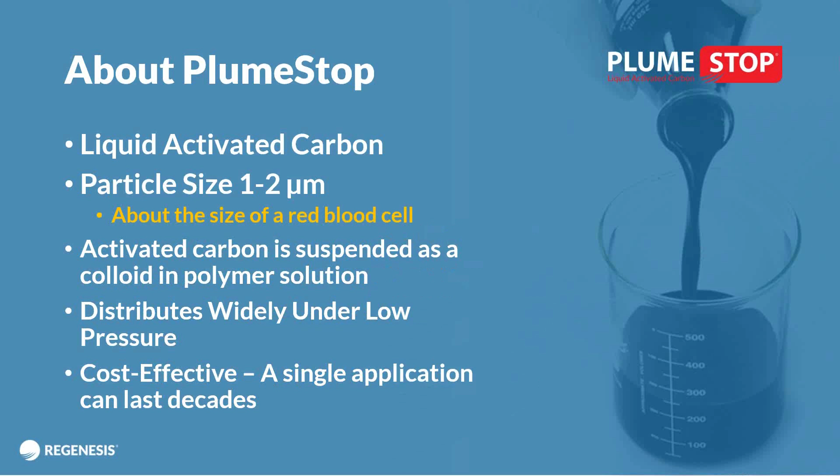So it looks like black ink. You put it in the subsurface and it'll distribute widely under low pressure, and a single application is cost effective, and as we'll talk about later, it can last for decades.

So how does it work? Again, the activated carbon coats the aquifer matrix, and it provides extremely fast access to sorption sites because it's only 2 microns in size as opposed to granular activated carbon. And if you're interested in the actual kinetics of it, we'd be glad to get you some information on that by third parties, where it shows that the smaller particles offer much faster reaction and sorption than larger particles such as granular activated carbon or powdered activated carbon.

And once you flow this into the subsurface, it converts that underlying geology into a purifying filter. So as the plume migrates, contaminants are sorbed as the groundwater passes through that zone.

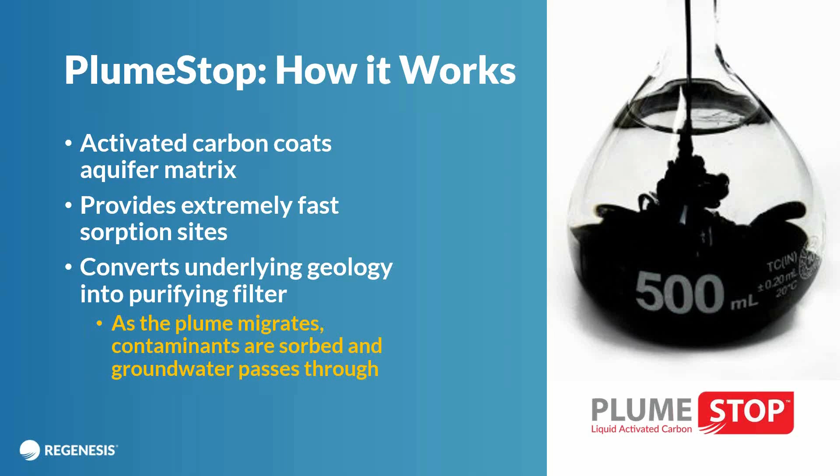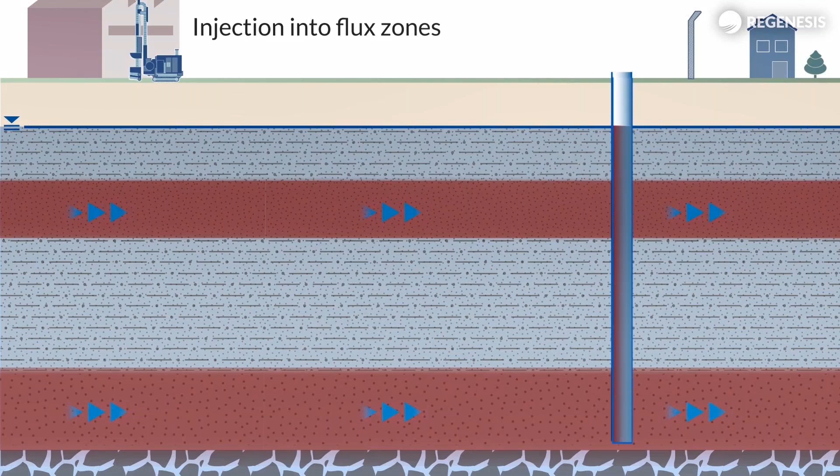And in this case, you get a driving force taking contamination from the flux zone where there's high concentrations to the lower concentrations in the immobile porosity. So let's take a look and see what happens over time here as this moves forward. So here you have the contamination moving through the flux zone from the left to the right, and you see contamination migrating out into the immobile porosity.

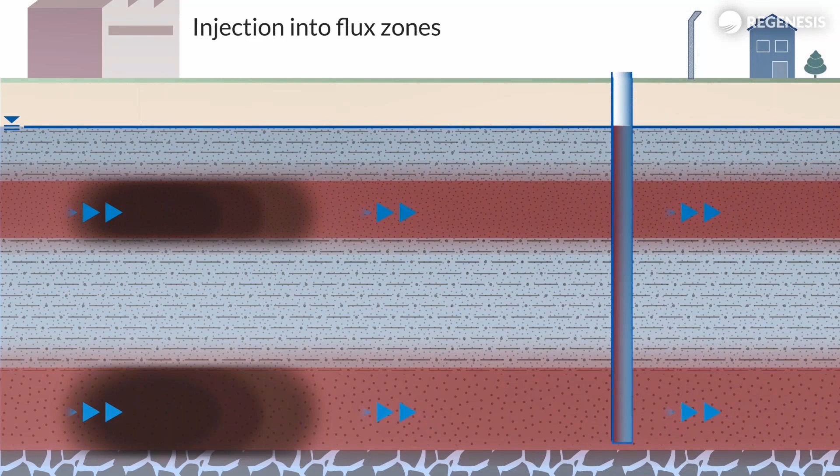That's forward diffusion. What we do is we come in, and if you install Plumestop, the Plumestop will migrate out into the flux zone and settle in, permanently converting the subsurface into a sorptive filter with a 1 to 2 micron layer of carbon. And it does not stop flow or block permeability. We call this the Plumestop treatment zone. And you'll note on the up gradient side of the flux zone, there you still have contamination migrating into the Plumestop.

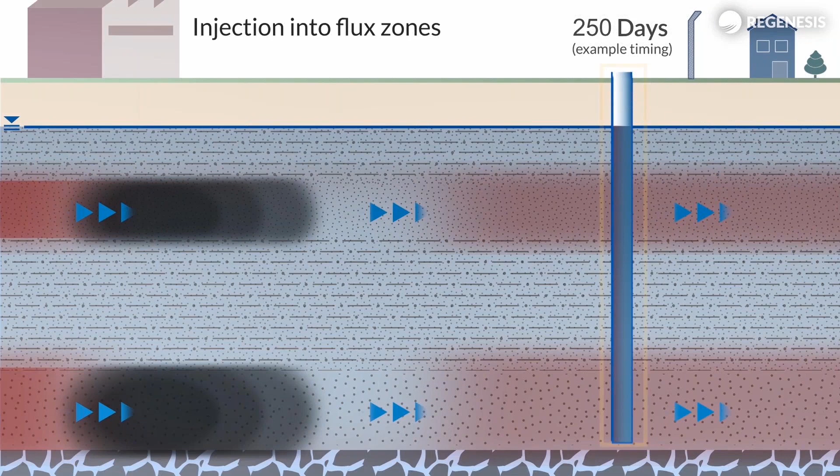And down gradient of the Plumestop, all of the contamination has been taken out of the groundwater, and you have clean water exiting. Now, once you have clean water being generated by the sorption of the Plumestop, you'll start to see back diffusion. That is the contamination moving back out of the immobile porosity and into the flux zone. Well, within the Plumestop area, all of that back diffusion is captured, and you see nothing moving out. There is some back diffusion still occurring outside of the Plumestop zone, and you will pick up a small amount there. But where the Plumestop exists, you have all of the back diffusion captured and clean water exiting the Plumestop zone.

So now you've seen how Plumestop can actually stop contamination from migrating. You see PFAS material is now locked up onto the Plumestop area, and if it's at the toe of the plume, there's no back diffusion at all. If there is back diffusion, it's caught by the Plumestop. And you see nothing coming out at the back in your monitoring well. So let's focus now on the impact of that. What's happening here? By locking it up with Plumestop, you've actually eliminated the risk of the PFAS.

Some of you may have heard me tell this story before, but back in the mid-'80s, there was a medical doctor that left his practice in Portland, Maine, by the name of Frank Lawrence. He left his practice to become the first environmental risk assessor, and a risk assessment company, ELD, Envirologic Data, was formed. And he would go around the nation speaking to regulators and PRPs about what environmental risk really is and how to stop it. And he's the one that showed that risk is equal to hazard times exposure.

And I remember vividly sitting in a room full of regulators when Frank said, can you ever imagine having a 3-year-old child stand within 10 feet of a man-eating tiger?

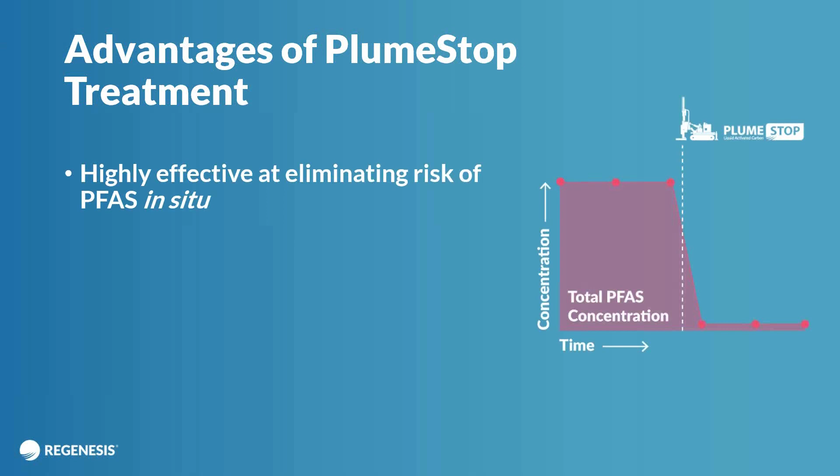So the advantages of Plumestop treatment: highly effective at eliminating the risk of PFAS in situ. Concentrations drop dramatically upon injection, depending on how close your monitoring well is to that zone, as we just discussed. It can be within a month, you'll see it drop to non-detect. If your monitoring well is a distance from the actual application site, you may have to wait for the groundwater travel time and the back diffusion. However, certainly within a matter of months, you'd see down to below regulatory levels.

It's very cost effective. At this specific site that I just mentioned that Rick McGregor injected in the subsurface up in Canada, it was a very small site. The total cost of that was $73,000 for the design and application. If you had done pump and treat on that site, the estimates are about $150,000 worth of design and installation, and then $60,000 a year.

And as I said, it's estimated the Plumestop will last some 50 years at this site, but let's say it only lasted 20 years. To run that pump and treat system for 20 years would cost you $1.3 million versus the $73,000 that the Plumestop costs. So it's a savings of 1.23 million. So that gives you an idea of the scale of savings by keeping the treatment in situ instead of pumping and treating to the surface and having those O&M costs.

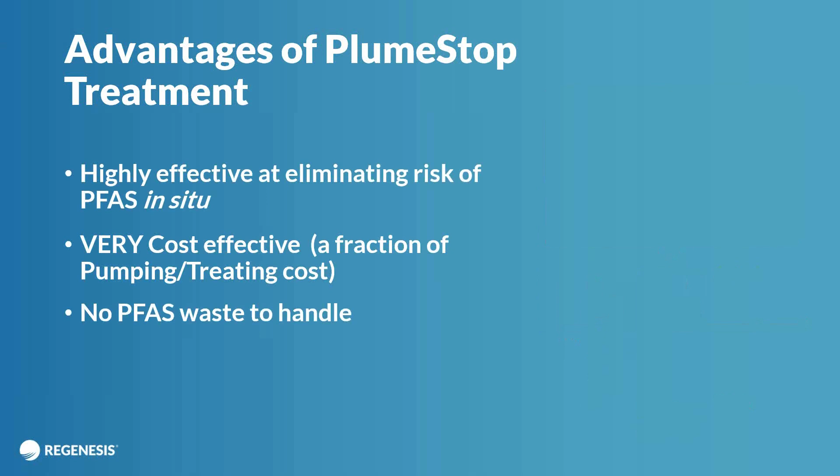The other thing that's really important to understand is that when you pump and treat PFAS, you generate a waste that has to be handled. Whether it's ion exchange resin that has to be regenerated or disposed of, or carbon that has to be regenerated and disposed of, you have PFAS waste to handle. And landfilling is becoming very limited for PFAS waste. And in some countries, it's now banned. So incineration then is the only option.

And I don't know if you're aware of it, but incineration is now in question. There was some research done by Bennington College on a major incinerator in New York, and the professor and his graduate students showed that, in fact, it appears that the incineration of PFAS is incomplete, and that there's incomplete combustion products raining down on the soils around the plant.

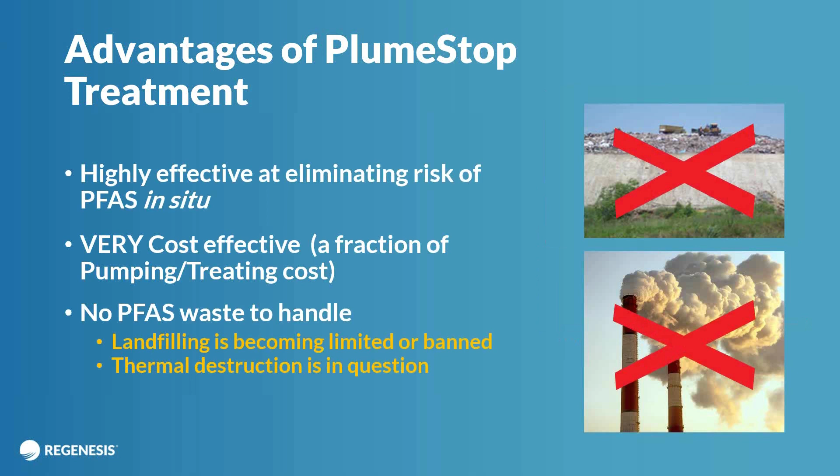And this is not dissimilar to what we saw in the 90s with PCB incineration, where we thought incinerating PCBs was a solution until we found that thermal destruction was incomplete and we generated dioxins. So right now, thermal destruction is in question. So by using Plumestop in situ, you're eliminating the risk of the PFAS and you're generating no waste in the process.

People are becoming aware of the fact that they can treat and eliminate the risk in situ. And so what we're seeing is we have another 94 projects right now in final design or regulatory review around the world. There's a hotbed of this in Europe now, as well as along the eastern US coast. So we're seeing somewhere in the range of about 114 sites that either have installed or are in the process of installing Plumestop to eliminate the risk of PFAS. So as I say, it's growing exponentially.

And the project types range from small manufacturing sites, the smallest ones, all the way up to Department of Defense sites, very large applications, a US EPA Superfund site, and major airports. These have all already been injected. We're already treating PFAS on these sites: EPA Superfund, defense sites, airports, and manufacturing facilities. And I want to mention that on every one of the sites where we've injected Plumestop to treat PFAS, all of the projects are performing as designed, with target PFAS compounds below regulatory levels.

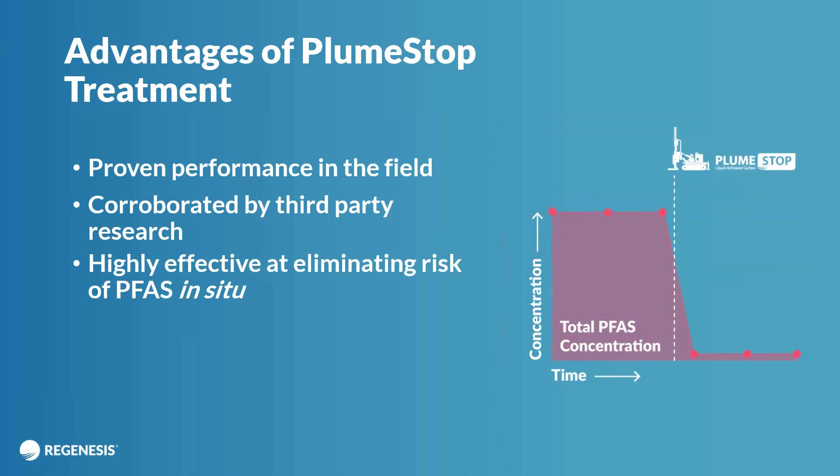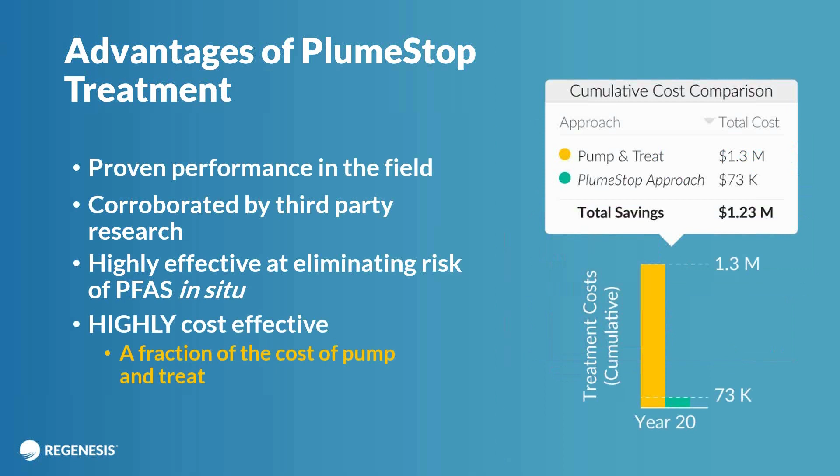And we're now going on 5 years of data at sites, with third-party longevity estimated in terms of decades with a single injection. And by the way, if after that injection you start to get breakthrough in 25 or 30 years, you simply put in another injection and you get another 25 or 30 years of risk eliminated. And it's highly cost effective, as I've shown you. It's a fraction of the cost of pump and treat. Oh, I forgot to mention also that there's no PFAS waste generated by using Plumestop in situ. So that's a look at the technology.

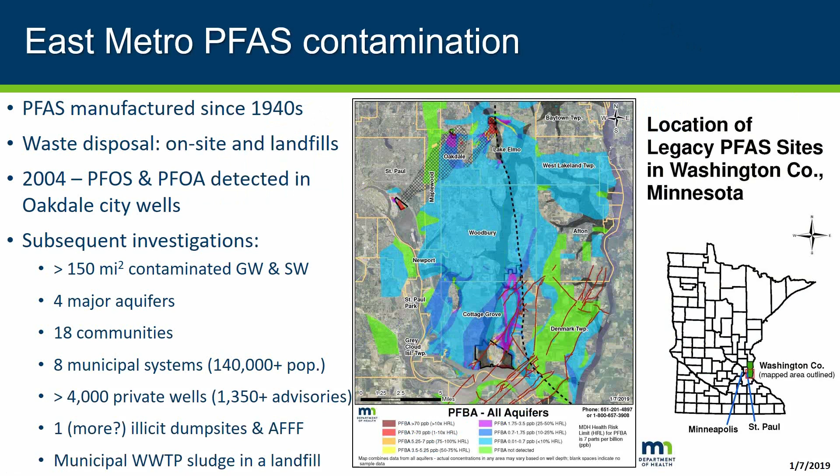We also have a major system of bedrock faults in the southeastern part of the county. This is a horst with fault blocks that have vertical displacement up to 150 feet, and then subparallel joint sets that are also seeming to control the flow directions.

So just a little quick background on where we're at in Minnesota with PFAS in our drinking water. We set very early on some fairly high levels allowed for PFOA and PFOS. As we've learned more about these chemicals along with the rest of the country, you can see our guidance values have dropped dramatically, with some major jumps both in 2007 and then again in 2016, when the EPA issued their lifetime health advisories and the studies related to those numbers.

And our further evaluation of those studies, as well as more recent information, has led us to set even lower allowable levels for the long chain PFAS, such as PFOA, PFOS, and PFHxS. We also evaluate PFAS as a mixture in drinking water through a calculation called a health risk index that allows us to evaluate health risk due to the mixtures that we almost invariably find when we're looking at people's drinking water. And so currently the guidance values are close to some of the low values being set across the country, a little bit higher than some of the East Coast states have set.

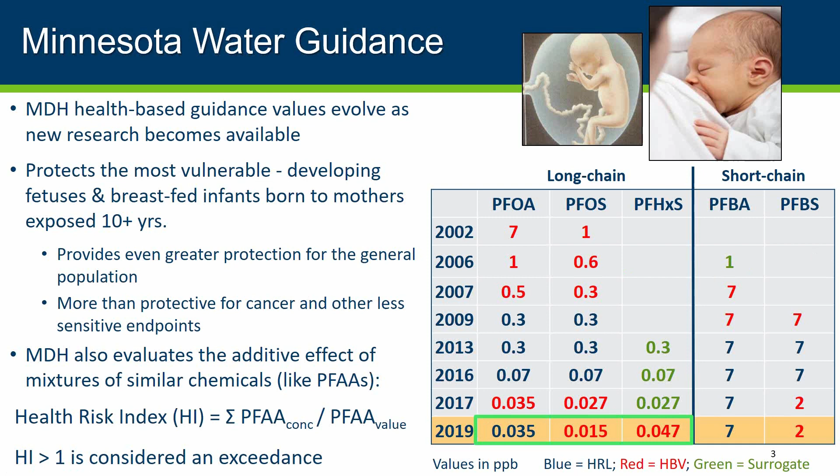So starting in around 2006 through the 2013 period, our work was controlled primarily through a consent order with 3M that held 3M responsible for site investigations and remedial actions at the 3 disposal sites, as well as their own property. It provided partial funding of a state cleanup at a Washington County landfill, and it also provides the funding for our ongoing sampling and treatment of both public and private wells that have been impacted by PFAS, and the treatment needed when those wells exceed our guidance values.

Under that consent order, we provided either carbon filtration or city water connections to about 250 private wells in 2 communities, as well as a treatment system for the wells in Oakdale. It also provided funding for some statewide investigations that I'll talk about in a little while, for things like shallow groundwater, AFFF training sites, fish, wastewater treatment plants, and landfills. Basically, it was funding to allow the state to investigate PFAS at non-3M related sites.

As part of our investigation and cleanup of both the Washington County landfill and the 3M sites, unfortunately, we didn't have Plumestop at the time, or at least it hadn't yet been identified as a possible treatment option. And so it really was back to the future for our work at these sites. And so it was dig and isolate. Some of the dirt was incinerated because of other contaminants that didn't allow for it to be landfilled, but primarily both sediments and soils were excavated, were dredged, and then put into containment cells, triple lined with leachate collection. And groundwater at the sites was basically pump and treat response.

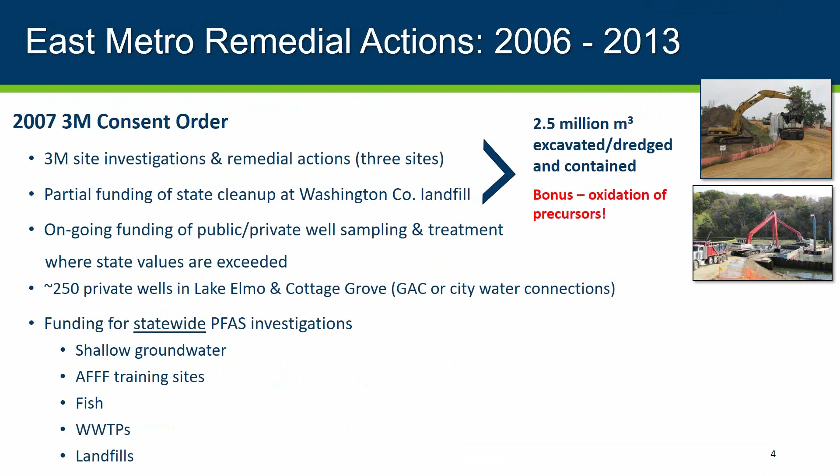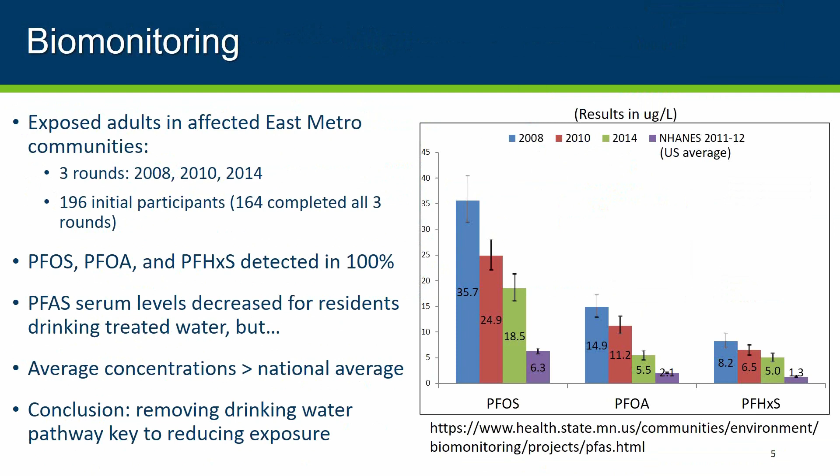People are trending down towards the national average. Of course, across the country, everyone has been exposed to a certain level of PFAS, probably through consumer products if their drinking water is not affected.

In 2016, I mentioned the EPA issued their lifetime health advisories, which led us to lower our drinking water numbers over several years, which expanded our investigation area and the number of wells with drinking water advisories. We've also improved our analytical method to achieve lower detection limits, which also expanded the area that we found to be impacted. And so in 2018, we got another input of funding to help us with this work through the settlement with 3M of a natural resource damages litigation. That primarily is funding clean drinking water for both public and private systems, as well as evaluating a surface water pathway with a secondary goal of doing some natural resource restoration.

So at this point, this is the impacts that we've identified from PFOS and PFOA in the East Metro. You can see PFOS is largely confined to either on-site at the disposal facilities, but also fairly widespread in the northern part of the affected area, and I'll get into that in just a minute. Whereas PFOA is much more widespread, and this is probably due to a change in the chemistry that was being manufactured at the Cottage Grove facility. The earliest disposal site was the one in Oakdale, so it received both sulfonates and carboxylates, whereas the later chemistry and the waste disposal associated with the Washington County landfill and the Woodbury site was focused more on carboxylate chemistries, and so the PFOA and other carboxylates appear to be much more widespread throughout the area.

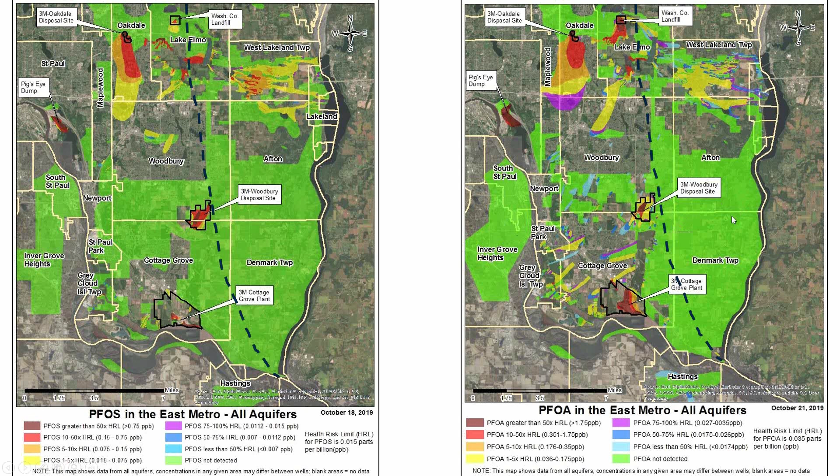The Oakdale disposal site is in a large wetland complex that's drained by a stream that flows eastward towards the city of Lake Elmo. And as it moves to the east, it becomes a losing stream, and much of the year is a dry creek bed because the base flow is infiltrating through the stream bed and back down to the groundwater. So all along its course, we have infiltration back into neighborhoods that are supplied by private wells and had many hundreds of wells impacted by that.

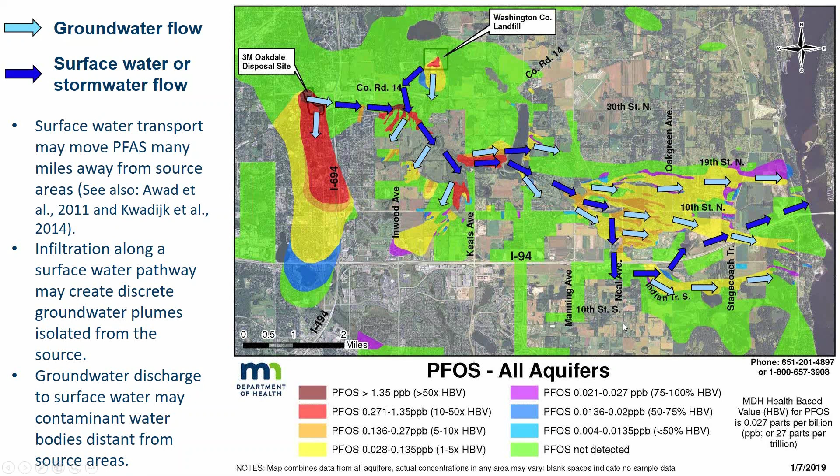So it's an important reminder when we're working at our sites that groundwater is a major pathway, but surface water can really complicate your understanding of how your contaminants are migrating, because the surface water can transport across groundwater divides, as it did in this portion of our plume, and then re-infiltrate and create discrete groundwater contamination zones miles from the actual source area. And we've seen this at other sites as well.

I already mentioned the 2018 settlement with 3M that has provided additional funding to do the work. That work is ongoing, especially the portion trying to identify the best options for providing clean water to these communities. There's been a long, almost 2-year process now of community participation to evaluate what are the best either treatment options or other systems for providing clean drinking water and expanding the city water systems to include more people.

That we hope to see wrapped up in the next few months, and then plans start to be developed for installation of those expanded drinking water supply systems to areas currently getting their water from private wells that are highly impacted and are on carbon filtration systems, which is not a good long-term solution for people, and very expensive for managing into the future.

So part of the settlement was focused not only on providing clean water to the cities and to the private well owners, but also for evaluation of that surface water pathway and hopefully restoration of it so that it stops being an ongoing release to the environment for the PFAS. And we hope that this will provide some opportunities for innovation along the lines that Scott was discussing, and maybe some other opportunities as well.

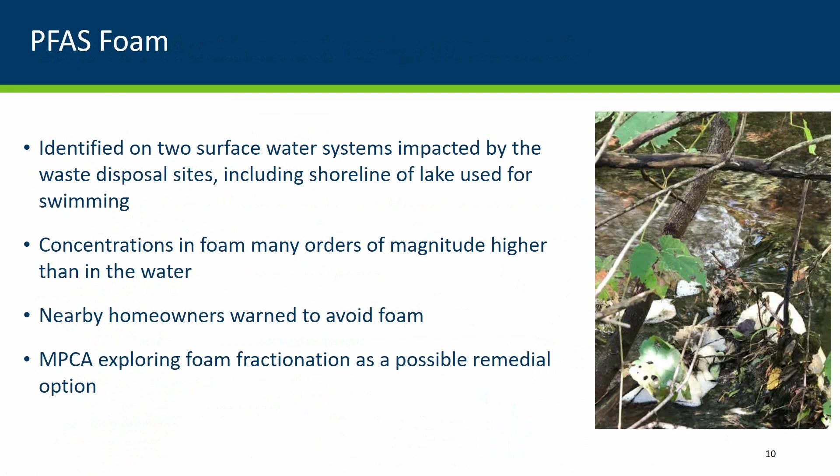One thing that the state is currently looking at for that surface water is foam fractionation, and whether that's a way to remove some of the contamination from that system. We do know we have foam showing up on 2 of the surface water systems that have been impacted by the sites, and the concentrations in that foam are many orders of magnitude higher than what we actually detect in the water because of the high affinity of PFAS, especially PFOS, for the air-water interface. So that's the work that we've been doing in the East Metro, and a quick update for you on that.

I wanted to also talk about what we're doing statewide, because like other states, we are now trying to get our arms around the extent of this problem and how to identify sources and conduits that are causing release of PFAS into the environment, and then trying to prioritize those for actions. Of course, like most states, our initial primary focus has been on AFFF sites where we find high concentrations of PFAS.

We did some work early on in 2008 with some of the funding that was made available through the consent agreement with 3M, and sampled sites across the state that did identify one site, the Bemidji Airport, that I'll talk about in a little more detail in a second. But it also helped us to understand that the primary releases are occurring at larger uses, not the municipal fire training sites that are maybe once a year with a small volume of foam, but the larger training areas, Department of Defense sites, and some of our training academies, refineries, and airports.

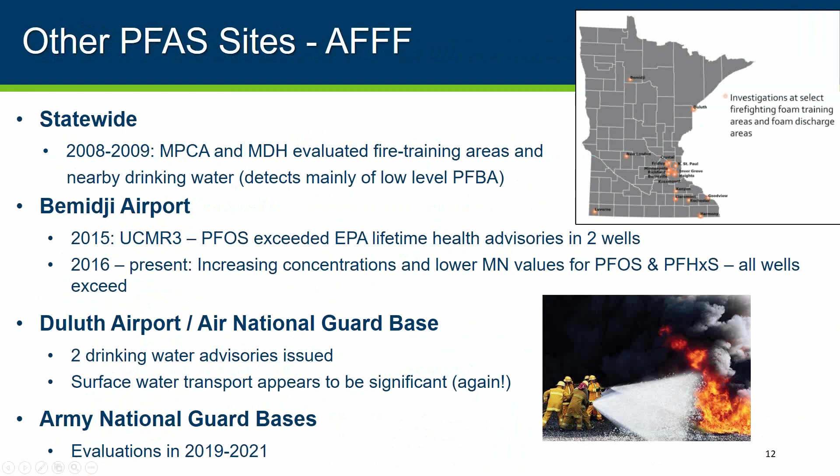We also have identified through a site investigation the Duluth Airport, and I'm sorry, that's the one I'm actually going to talk about. And we're in the process of evaluating some Army National Guard bases over the next couple of years. The reason I want to talk about the Duluth Airport and Air National Guard base is because, again, surface water appears to be playing a major role in the transport of the contaminants.

We also have a major creek, Miller Creek, which runs from just to the northeast of the airport, across the southeastern edge of the airport, and then south, and then it trends to the east out to the St. Louis estuary and into Lake Superior. It also has high levels of PFAS in it downstream of the airport.

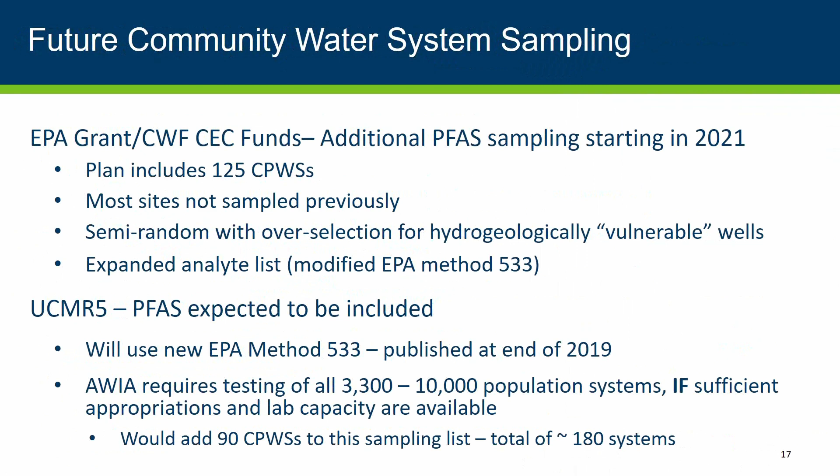We also have an EPA grant that we'll be using to sample an additional 125 public systems, looking at somewhat of a semi-random selection, but also at the most vulnerable systems, and using an expanded analyte list compared to what we've used in the past. And of course, UCMR5 is expected to include PFAS, but that's still several years out. I believe that will be in 2023 to 2025. I may have my dates wrong on that one.

We've also done quite a bit of shallow groundwater sampling starting in 2008, not good detection limits back then, so we've redone that work and found that 70% of our tested wells contain PFAS, primarily PFBA, but you can also see we had a number of wells that exceeded our guidance values for PFOA or PFOS. If there's any good news, we did see declining concentrations of PFAS in wells that have been sampled multiple times between 2013 and 2017, likely due to the phase out of the PFOS and PFOA chemistries here in the US.

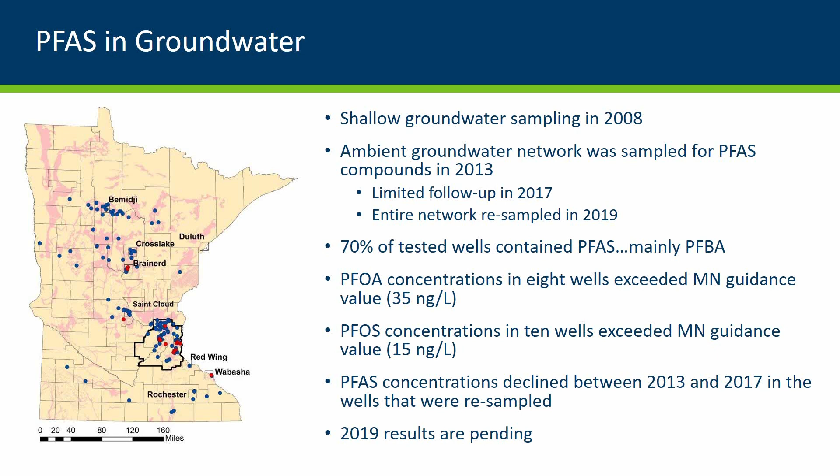In Minnesota, we protect our surface waters for multiple uses, and our main concern to date has been accumulation of PFAS, especially PFOS in fish. So we've been looking at that across the state. 95% of the waterways we've tested had at least one fish with detectable PFOS. And you can see we've got 10 water bodies with impairments based on fish consumption advice of no more than 1 meal per month or less. We have one lake where we've advised people not to eat any fish.

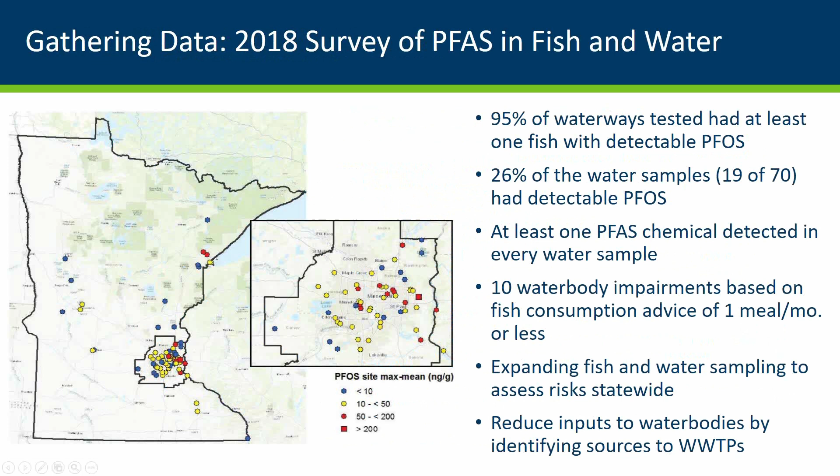Moving along, we do have a lot of next steps in regards to surface water, including additional fish sampling, but also the DNR this fall has been collecting deer organ meats, liver and kidney, for deer harvested near sites with known PFAS in the surface waters to see if there's any risk of exposure to hunters who are using those organs for food. And we hope to improve our understanding of bioaccumulation and determine whether we need a statewide water quality standard for PFOS in fish tissue.

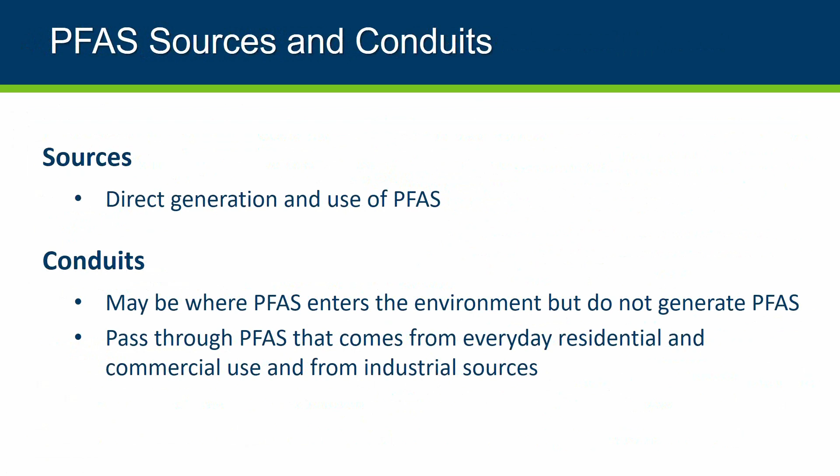And so there's still a lot of work going on, including work on risk assessment for PFAS foam and evaluating risks to aquatic life and wildlife that drink from surface waters. The state, through the Minnesota Pollution Control Agency, is also trying to evaluate PFAS sources and the conduits that are channeling PFAS into the environment.

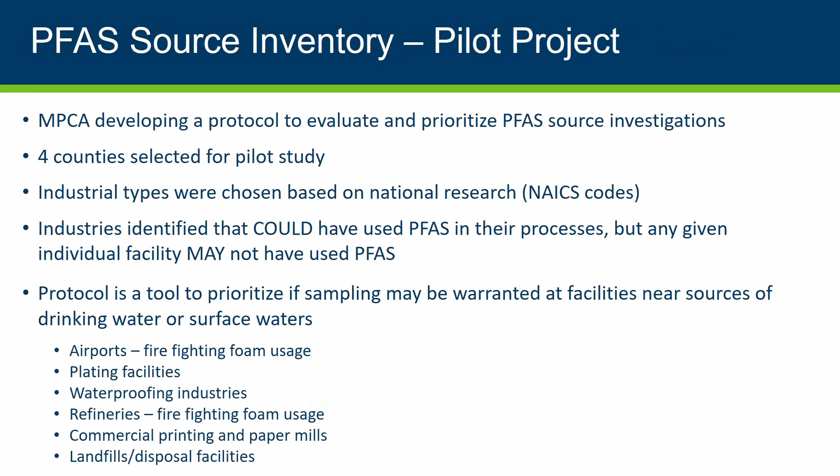And so they are working a pilot project to try and develop a tool to identify and prioritize potential PFAS sources using the NAICS code to identify which industries may be using PFAS in their processes, and then trying to prioritize those that are closest to drinking water and surface waters. The work to validate that protocol has been delayed, of course, because of some of the COVID response here in Minnesota, but we hope to see that proceeding in the next year or so.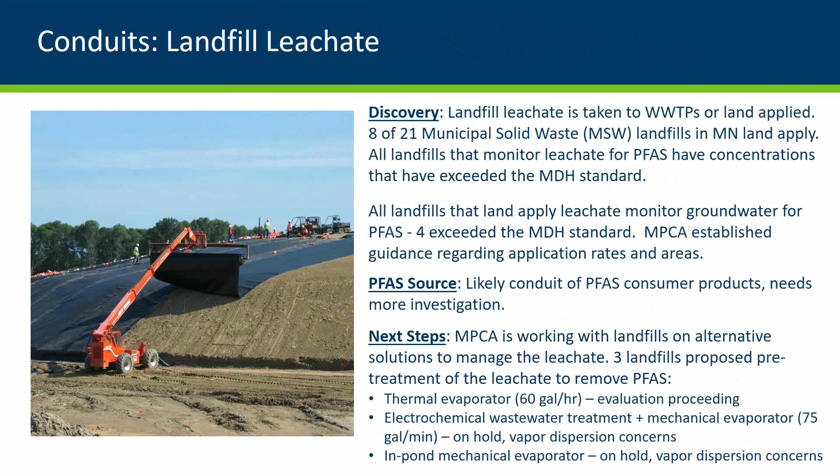We've also done a lot of work looking at the conduits for PFAS, the many sources in consumer products that then pass through both our landfills, where we've been finding PFAS in 97% of those sampled, as well as landfill leachate, which can have very high levels of PFAS, and then looking at various alternatives for managing that leachate, including thermal evaporators and various electrochemical treatments to try and remove the PFAS from the leachate before it can go for further treatment.

We've also identified that runoff from our compost sites that not only collect yard waste, but also consumer products such as food, compostable food packaging and serviceware, has concentrated PFAS in that runoff, which they are required to collect. So work is ongoing to try to determine what are the sources to those compost facilities and how to manage that.

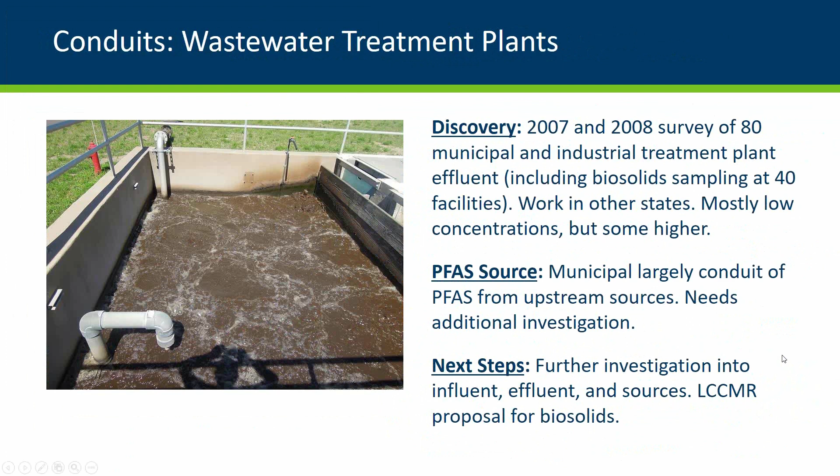And finally, of course, wastewater treatment plants are also a pass-through system where PFAS enters our surface waters. And so work is ongoing to look at how do we manage both the effluent and the biosolids from those facilities. We have a number of bills that were introduced this last session that are still live, as well as work ongoing at the Pollution Control Agency and the Health Department to identify regulatory gaps that we may be able to address, both in terms of products as well as risk assessment and treatment.

So we've learned a lot of lessons over the years, that drinking water is a major exposure pathway. I think I moved a little too quickly there. That we're constantly being surprised by where PFAS will end up in the environment and how it gets there. That surface water is playing a major role at many of our sites, and that our remedial actions are having unintended consequences that we have to try to anticipate and be ready for in terms of monitoring and treatment.

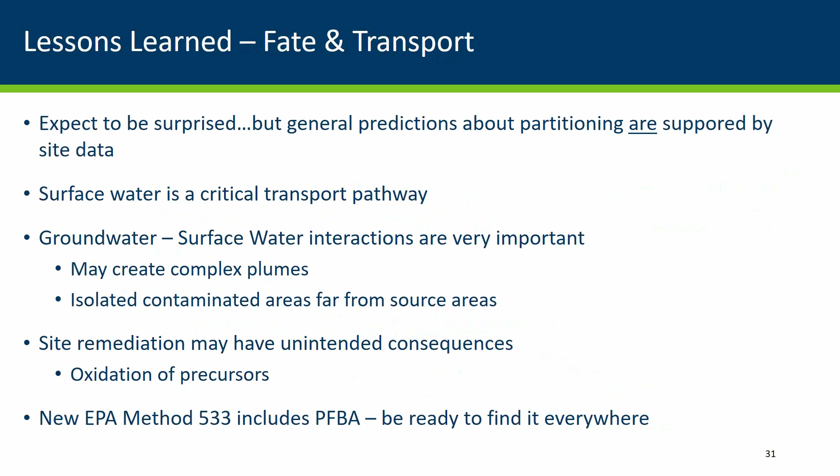And as we move into use of the new EPA method that includes PFBA, we should expect to start finding that extremely soluble PFAS in most of the sites where we're looking for them. And we also have a lot of things that we still need to evaluate and then prioritize for investigation and treatment to protect people and the environment.